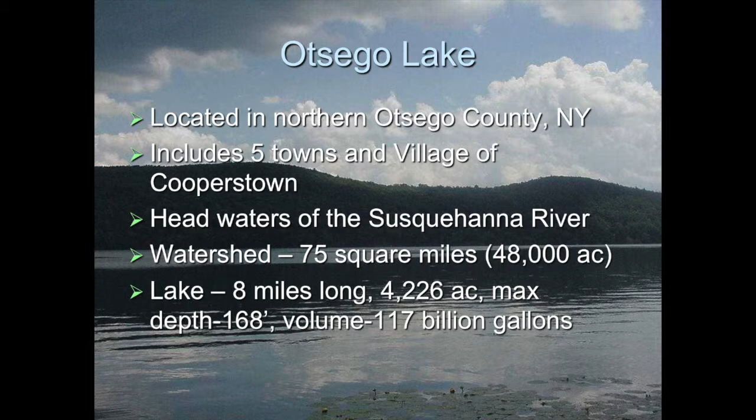Otsego Lake. It's located in northern Otsego County. It includes 5 towns and the village of Cooperstown in the watershed. It is the headwaters for the Susquehanna River. And there's the size of the watershed for the lake. Some data on the lake itself. Not quite as big as Lake George, but a very nice lake.

It is a drinking water supply for the village of Cooperstown, about 2,000 full-time residents year-round, but hundreds of thousands of visitors. I mean, it's the Hall of Fame, baseball and youth baseball, and of course the lake. It is a source of drinking water for about 40% of the camps around the lake. It is a cold water fishery, and it's a beautiful lake.

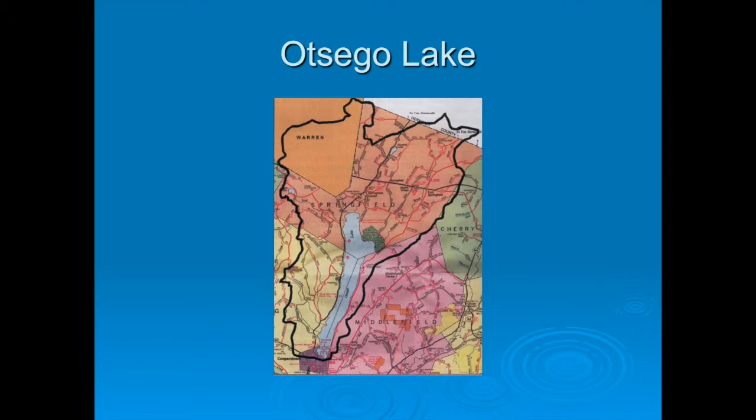Here's the delineation for the watershed. In the northern part of the watershed, very heavy in agriculture land use. East and west of the lake, steep slopes and fairly wooded land cover.

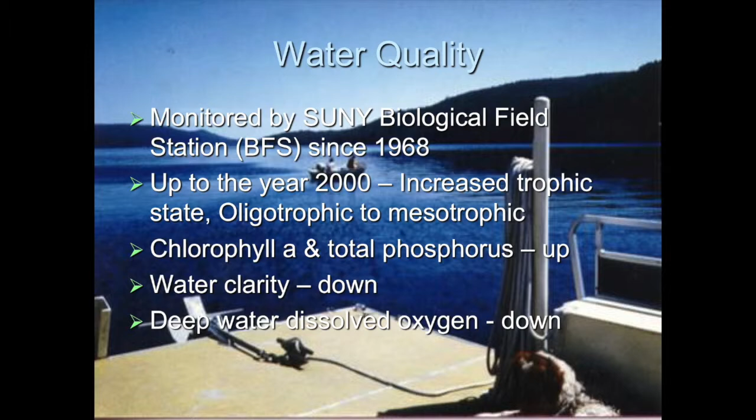Water quality. The lake has been monitored by the SUNY Biological Field Station since 1968. And in the 30-some-odd years up to the year 2000, what we saw was an increasing trophic state from oligotrophic to mesotrophic. And of course, the indicators are chlorophyll A, total phosphorus being up. Phosphorus concentrations were in the 12 to 14 parts per billion range at that time. Water clarity was down, so all those indicators. And we had issues with deep water oxygen late in the season.

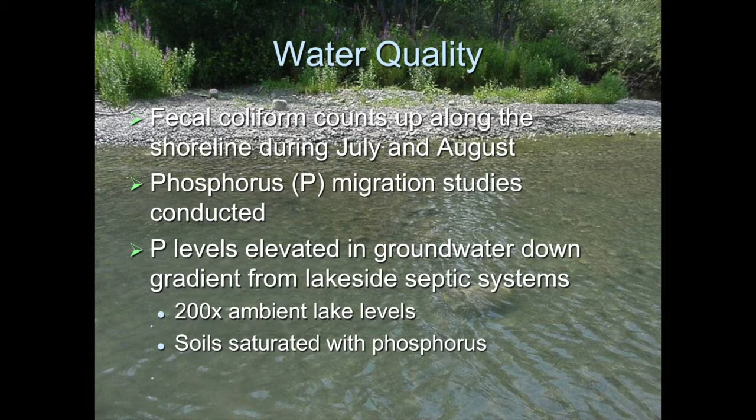Some more information on water quality. Because of the concerns for aging septic systems, we did some sampling near shore for fecal coliform and found increased counts during July and August for several summers. We also wanted to get a handle on phosphorus migration, and we did studies along that. And this is the biological field station doing this. Down gradient of septic systems, 200 times ambient lake levels is what we found in terms of concentration, and the soils were saturated with phosphorus.

A lake management plan was put together in the 90s. It had representatives from the municipalities. The field station was involved. DEC was also involved. And it was completed in 1998.

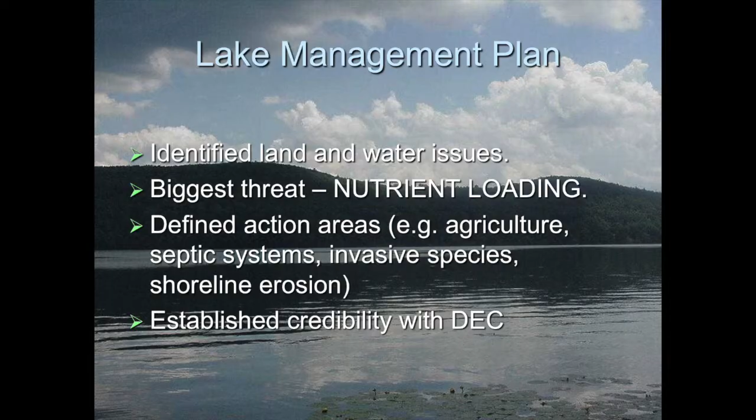The biggest threat to the lake was identified as nutrient loading. It was not a real big surprise because of the high degree of agriculture in the watershed, but also the concern about aging septic systems. The action plan certainly related to that agriculture and septic systems, but also identified invasive species as an issue and shoreline erosion. And it kind of established credibility with DEC in terms of getting grants.

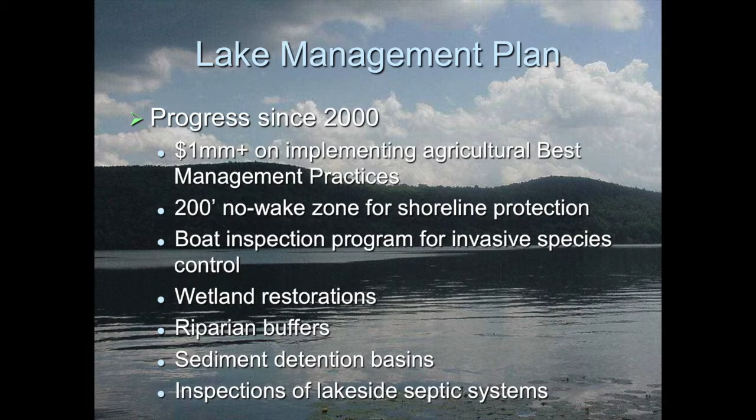The progress since 2000: a lot of effort has gone into BMPs for ag in the northern part of the watershed, a 200-foot no-wake zone, a boat inspection program for invasive species control, a lot of wetland restoration work, installation of riparian buffers, sediment detention basins, and then the inspections of septic systems.

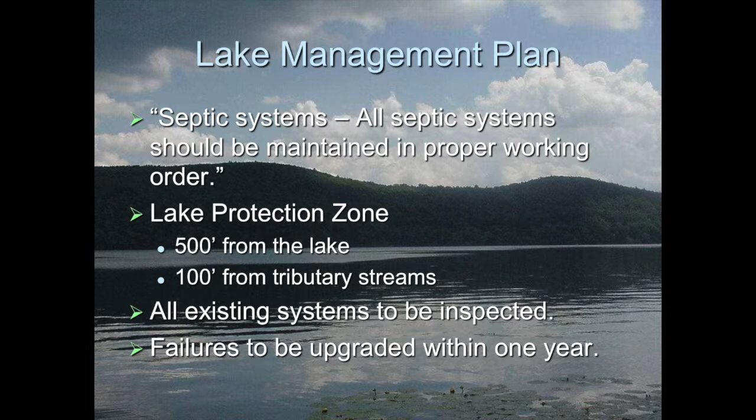In the management plan, it said all septic systems should be maintained in proper working order. A lake protection zone was established 500 feet from the lake and 100 feet from tributary streams, and all existing systems would be inspected, and failures would be upgraded within 1 year.

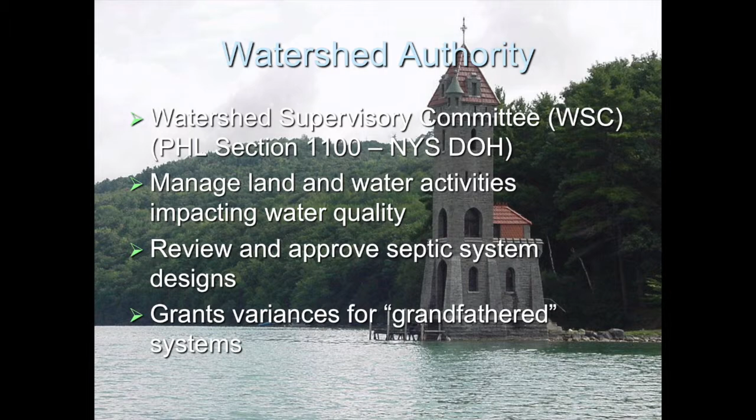The authority in the watershed: the Watershed Supervisory Committee. This committee was established under public health law, Section 1100, Watershed Rules and Regulations, in the late 70s. And this committee is made up of representatives of the municipalities and the village of Cooperstown. And the committee manages land. It basically is there to protect the lake as a drinking water supply. So it looks at all activities that relate to water quality, reviews and approves septic system designs, and grants variances for grandfathered systems.

The regulations: I've mentioned the zone of protection. It was set up to be a 5-year plan, a cycle of 5 years to inspect all systems. Passed systems would get a certificate of compliance, good for 5 years. Failed systems, a notice of violation with 1 year to upgrade. And the emphasis was on enhanced systems. I mean, there was not any situation where you could put in a conventional system. Small lots, steep slopes, poor soils, shallow depth of bedrock and groundwater. So dealing with enhanced systems no matter what.

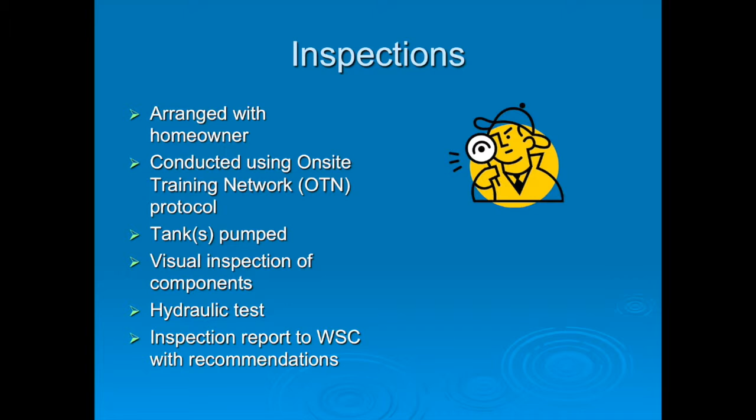So the inspections obviously are arranged with the homeowner. They're conducted using the On-Site Training Network protocol. It's a 6-page inspection protocol. The inspection includes a pump out to get a better look at the tank, so visual inspection of all components, and a hydraulic test. Test every water discharge to make sure that it's directed to the septic tank. And then a report is put together with a recommendation on pass versus fail.

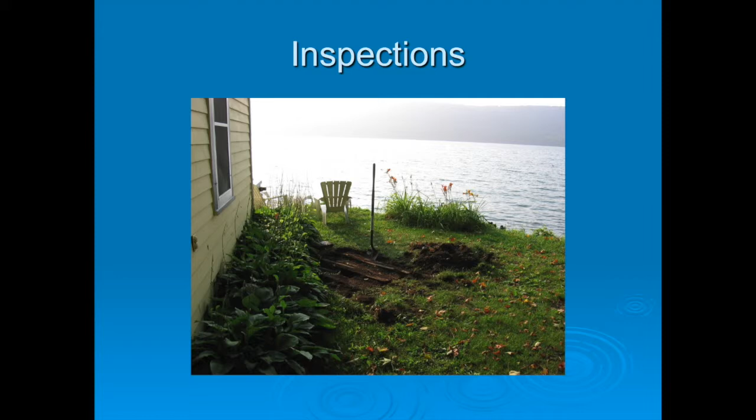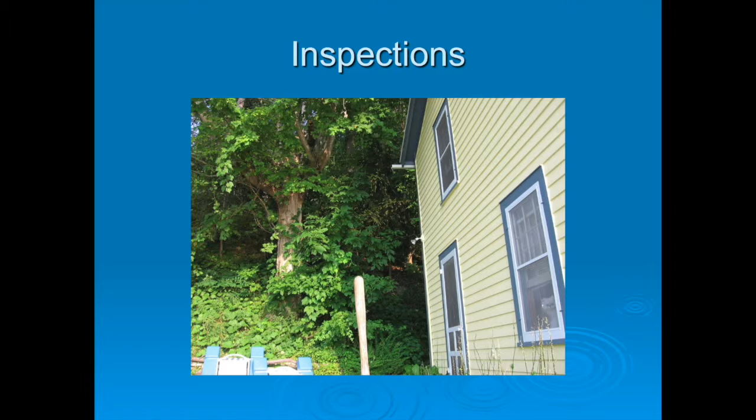Give you an idea of what we found during inspections. Typical lakeside home, right on the waterfront. We were beginning to dig up the septic tank there. You'll get another shot at that in a minute. And the camp is backed right up against a steep slope. And there's the top of the septic tank. Not exactly a watertight top.

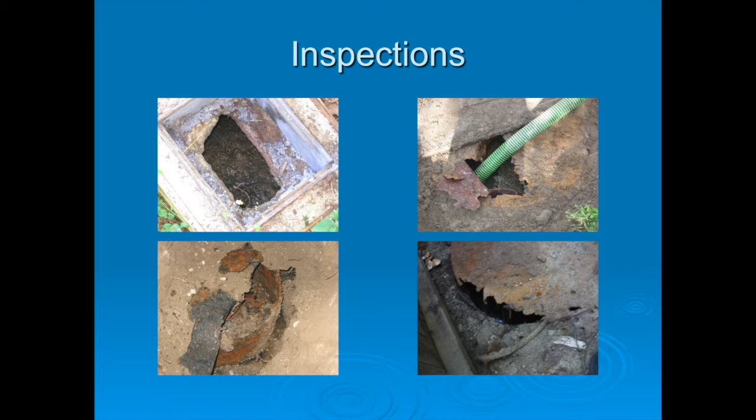And we found a lot of corroded metal septic tanks. That was cause for instant failure. I mean, these tanks were just simply not watertight. Older systems, 40, 50 plus years, that's what they used. They used metal tanks. Here's a seepage pit. Got a nice convenient overflow there. The lake is just downhill from that.

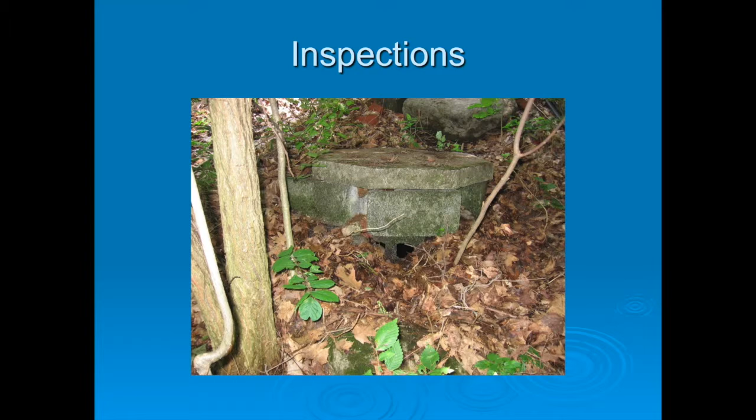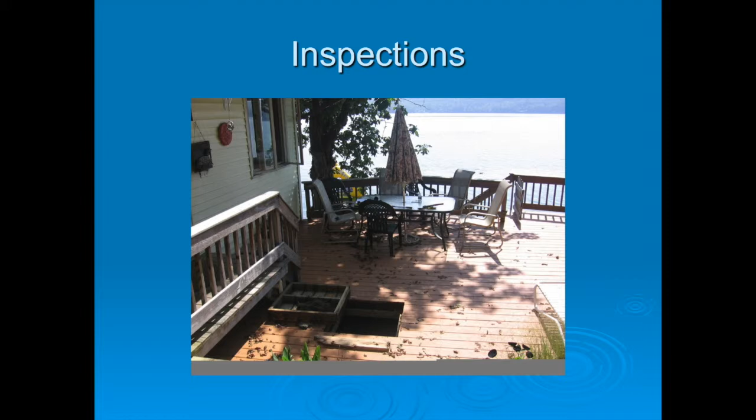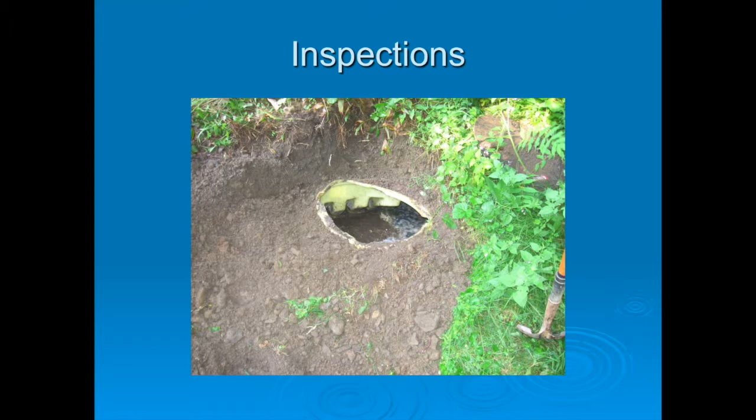And we found systems everywhere. I mean, people didn't know where systems were, but we had to find them underneath a deck there. Here's a creative use of, I think that's a beer keg, for a gray water system. Somebody decided to use a water tank for a septic tank, real thin wall, deformed quickly.

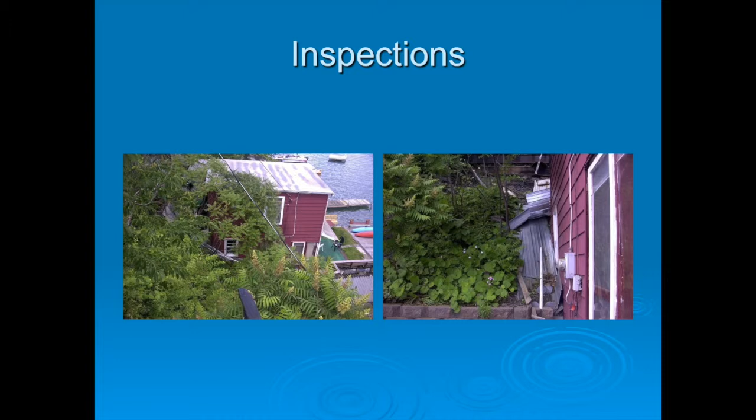More metal tanks. Here's a camp. A lot of camps on very tiny lots. This was on 1/10 of an acre. And the wastewater system was a seepage pit in back of the camp that drained into the shale bedrock. That was it.

The program was administered by me as the watershed coordinator. We have a trained inspector to do the inspections. And we used GIS to help track our progress with the program. I've mentioned we did send certified letters to property owners. I've already covered this. I want to get down to criteria for an acceptable system. Very important to have this very clear.

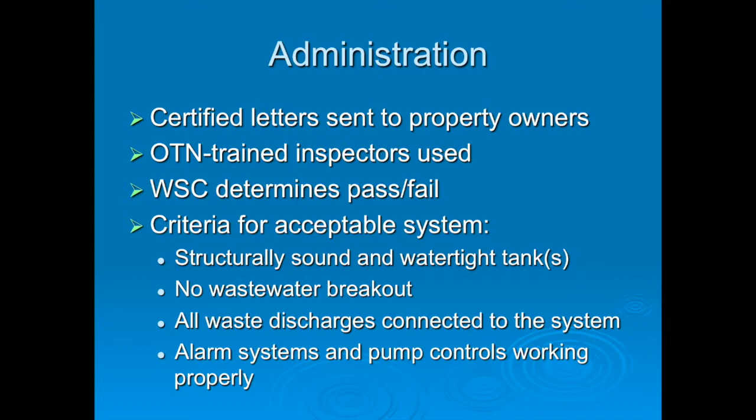Structurally sound and watertight tanks, no wastewater breakout like in a field, absorption field, all waste discharges connected to the system, no separate gray water, and alarm systems and pump controls in good working order. Get an up or a down on the inspection.

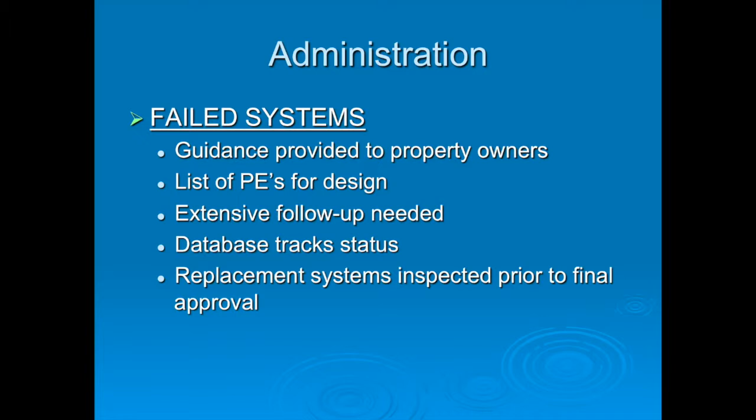For failed systems, we provided a written guidebook to property owners whose systems failed. I mean, it's a really, really big deal. We supplied them with a list of PEs for designing their system, and there was extensive follow-up. I mean, the regulations stated 1 year, but if it took 2 years, or it sometimes took 3 years, we just kept working with people, and we didn't knock them over the head. It was a real collaborative effort.

And of course, we had a database to track the system, and of course, the inspections that occur, the engineer has to inspect, you all know that. Where we are, for the first cycle, we inspected 370 systems.

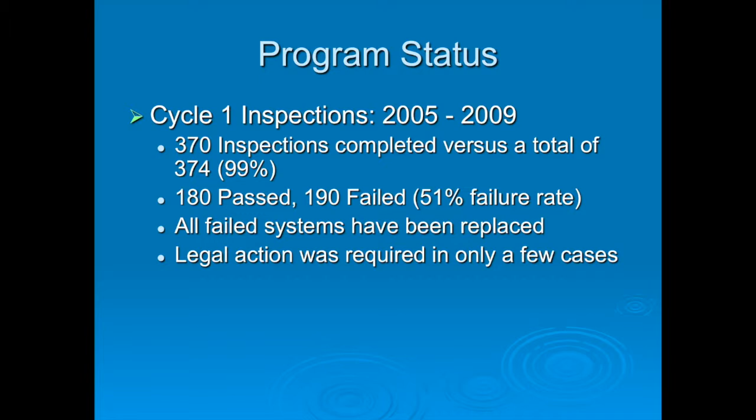Oh, that's interesting how that worked. Yeah, that's all right.

190 failed, so 51% failed inspection. Since then, this one was cycle 1. All of these systems have been replaced at full property owner expense. There was no money. There was no funding to help property owners. They paid for the systems. We could take legal action. We did in a few cases, but it didn't go very far. Once they got their letter from the town attorney, they decided to replace their system.

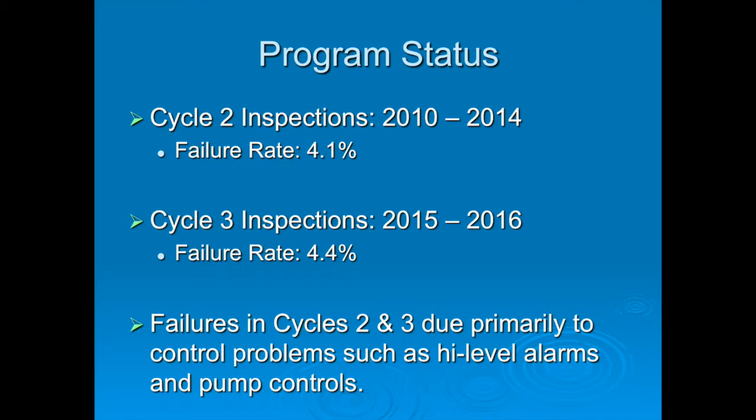Cycle 2, 2010 to 2014, failure rate of 4.1%. A nice decrease, which we expected. Cycle 3, we're in our third year now with 2017, 4.4%. So what we're finding now, because the systems are more complicated, are failures in the control systems. So that's something that we really look for.

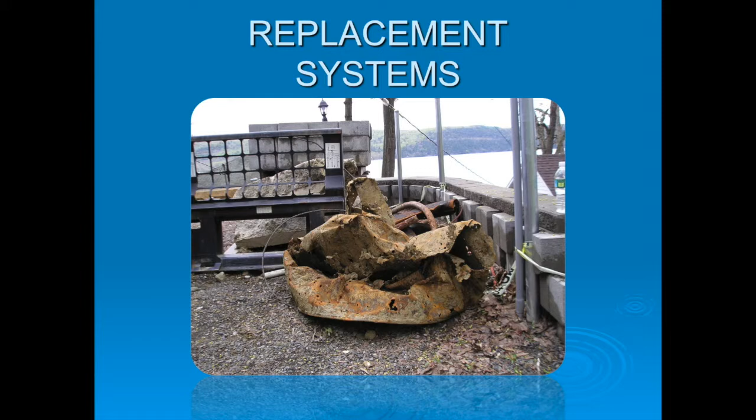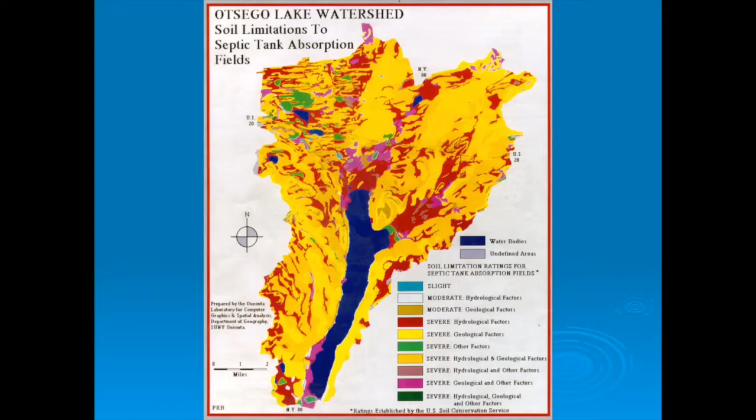Replacement systems. This is one of the main reasons why we're replacing systems. There's a Swiss cheese tank, metal tank there. You don't have to look too closely at this map. This is a soil limitations map. Both yellow and red is bad. There's nothing good about the soils. Not only the soils in terms of permeability, infiltration rates being really poor, but just topography. Everything was not good. So that led us to, as I mentioned earlier, the enhanced systems for replacement systems.

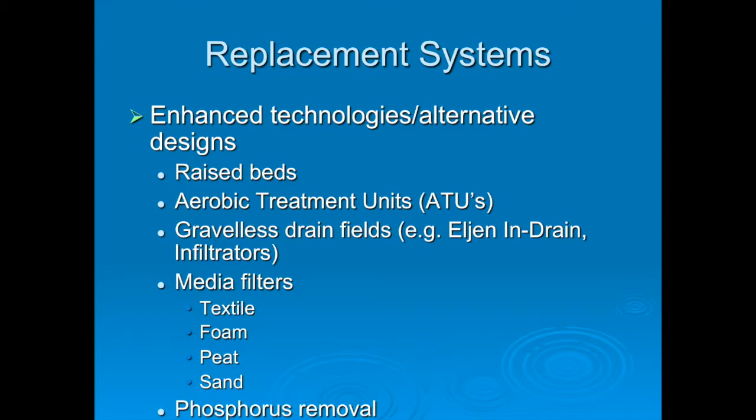Raised beds, aerobic treatment units (ATUs), gravelless drain fields. You've heard about the Eljen In-Drain. We have many Eljen fields in our replacement systems. Media filters, very interesting: textile, foam, peat, as you heard about from Puraflo, and sand filters. They've been around for a long time. And we did look at phosphorus removal. I'll talk more about that when I get on with this a little bit.

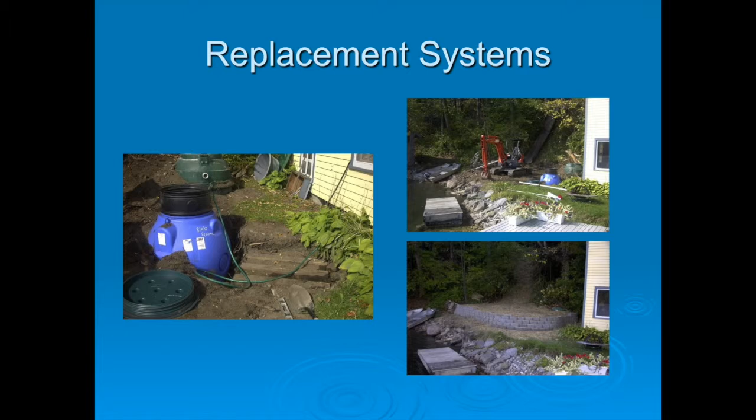Here's the camp you saw in the beginning, with the wooden top. This is an installation of an ATU. What you see in the foreground is a trash tank / pump tank. The ATU is in the background. You can see in the lower right, there's a raised bed, and there's where the field is, and there's an Eljen field there. Typical Moore systems, very similar systems.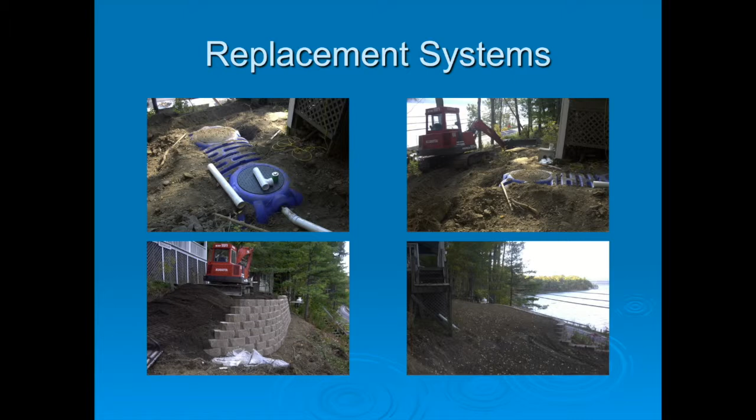Because these sites were difficult to get to, using a plastic tank made sense, but it had to be a very heavy-duty polyethylene tank. And this tank is made by Fralo. It's the only one the Watershed Committee approved for use as a plastic septic tank. And we also had to be creative. Here's a deck system. There's an ATU that's right there. Here's a foam media filter going in.

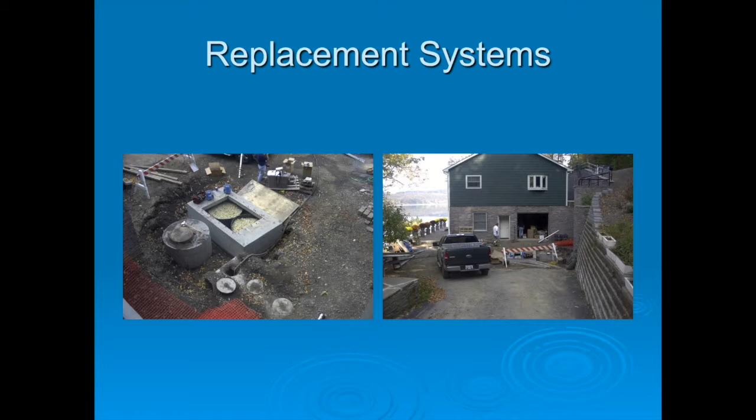Here's another typical situation where you have a pump station, pumps up to the septic tank and then to the absorption field. For all of these designs, we tried to get the absorption field as far back on the property from the lake as possible. So many pump-up systems. As I mentioned, we did look at phosphorus removal devices, systems. We had a demonstration project. I'll talk more about that.

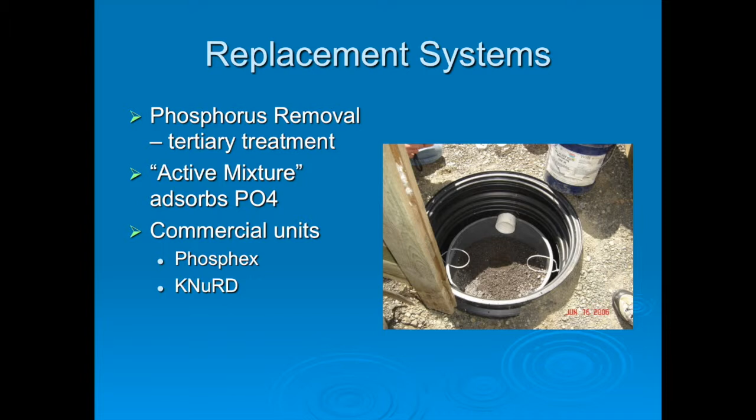This particular system used an active media called an active mixture. It was basically granular iron oxide, which adsorbs phosphate. They work great to begin with, like over 90% removal, but it would last maybe a couple of years before the media was completely used up and would have to be replaced. This particular one was made by Knight Systems called the KNuRD.

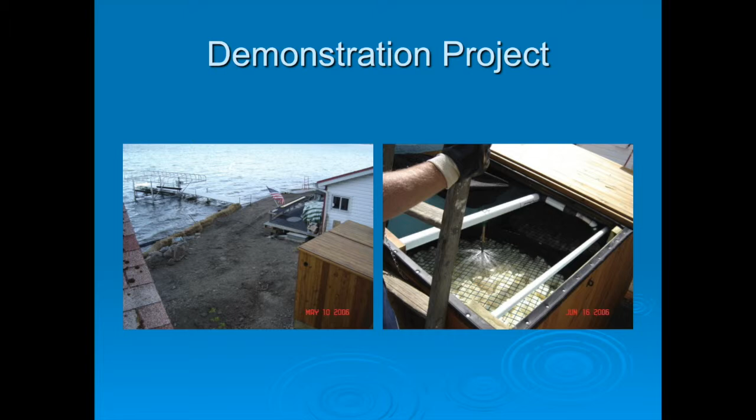We had a demonstration project funded with a grant with DEC where we looked at enhanced systems. And each one of the systems did have a phosphorus removal device on it. The systems were monitored for 3 years by the biological field station. And these were shared systems by two camps. This one is a foam media filter made by Waterloo Biofilter. There's the finished system. The unfinished shed is where the biofilter is. The effluent from there went through a phosphorus removal device and then to a drain field in the foreground. It was fully treated by then. That's just simply subsurface dispersal at that point, because it is fairly close to the lake.

We also looked at the textile media filter made by Orenco. This is an AdvanTex. This was the best performer in terms of our demonstration, in terms of percent removal of BOD and total suspended solids. Great system.

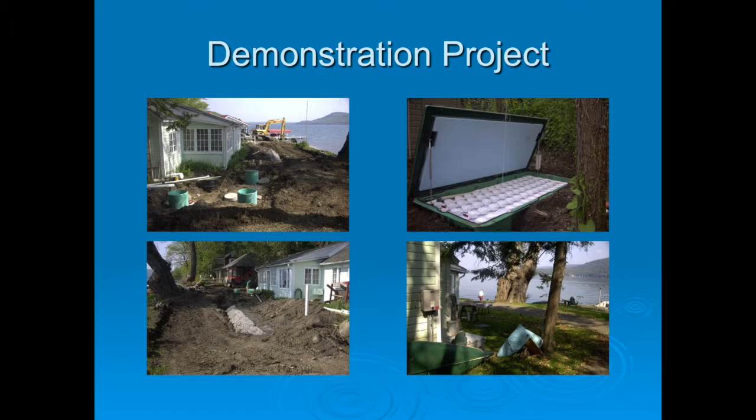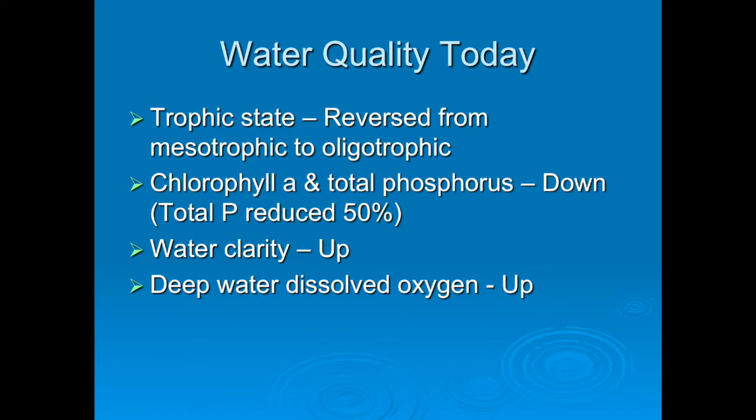So how are we doing today? This is 15 years later. The trophic state has been reversed from mesotrophic back to oligotrophic, with the corresponding indicators going in the right direction. Total phosphorus is down to around 6 parts per billion. It's been cut in half. That's remarkable. The water clarity is up, but we can't take full credit for that because we have zebra mussels. So they've been doing their filtration duty with that.

And obviously this is not just septic systems being replaced. There's a lot of BMPs in the ag lands to the north of the lake. But with any management plan, it's a whole series of things that you do to try to improve the quality of the lake. Those of you who do work in Lake George know that fully well.

So what have we learned? I mentioned public education. You can't do enough of that. You've got to get people as much as possible on your side with what you're going to do. The acceptance criteria, very, very important to be clear, and don't make any exceptions. Stick to it. The administration is extensive, particularly with failed systems. The kind of follow-up that's required, we didn't realize how much time that would take. It took a lot of time.

And we thought this was a great idea for people to share a system, cut that cost in half. Didn't go over too good. Legal issues and so on and so forth did not work so well. Bottom line, people love their lake. And we know they just do. And so if you work with them, in this case, they had to pay the full bill, they'll go along with it if you work with them in a collaborative manner. Don't bang them over the head with this thing.